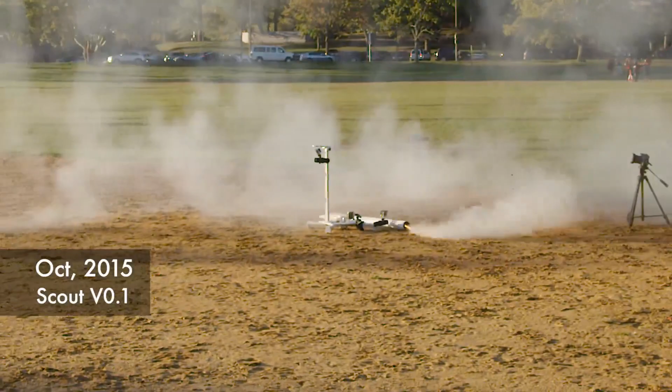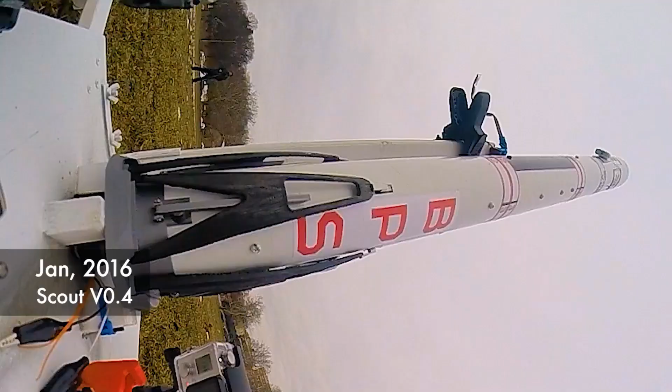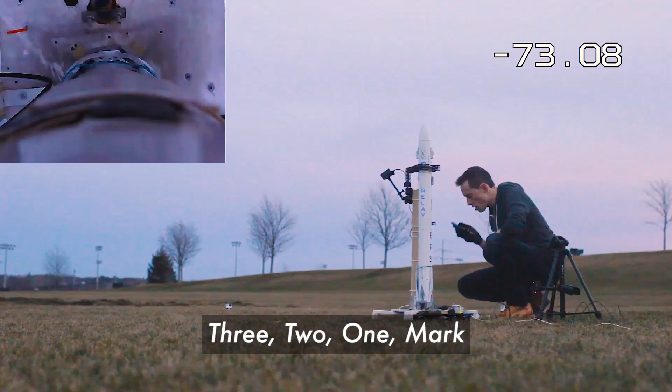The coolest thing I have ever seen. Oh dear.

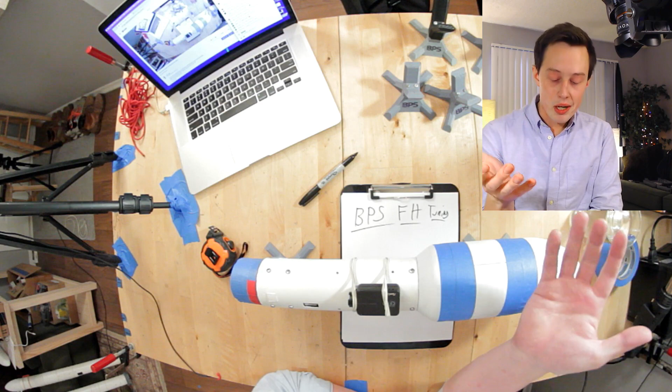Now, with a quadcopter or something like that, if you have a PID controller, that's what I use to stabilize most of my rockets. If you have a PID controller on a quadcopter, you could toss the copter up in the air and just put random P, I, and D gains in there. Those are like the sensitivities of the system. You could just toss some random ones in there, guess it, and see how things go. And with a quadcopter, your chance of breaking things is kind of high, but it's not nearly as high as a rocket. And so you don't really have room to guess on rockets.

You want to get all the math right that you can on the ground so that when it actually flies, you're not picking up the pieces after the flight. So that's what we're doing today. What we need to do is analyze how heavy this rocket is, how much force it's going to take to actually move it in one direction or the other, in all axes, and then we're going to bring it into a MATLAB and Simulink simulation and go through the process of tuning it.

Now, this isn't going to be the perfect way of doing it. In fact, this is not the correct way of doing it. It's a way that has worked for me, but if you are trying to actually build a rocket that goes to space, this is not going to work for you. We'll get into that a little bit later.

So you can see a MacBook in a MacBook, it's like MacBookception. Let me see if I can turn down the brightness and you can move it. This is probably a bad idea. Yeah, you can see it go through the vortex there. The Mac keyboard was backwards.

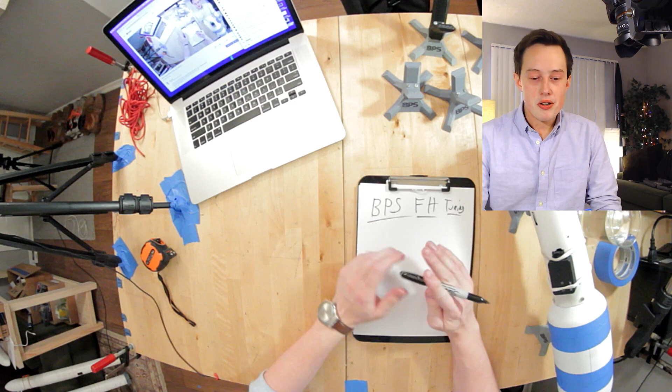Maybe we should get a better sense for the whole rocket before we do that. Before we do this, let's talk about a few more specifics. I know I'm delaying things, but hang tight, it'll be worth it. Let's move this over here and talk about changes.

One of the coolest things that will happen during the next flight of the Falcon Heavy model is we have active separation motors for the boosters. If you look up here, you'll see these tiny little A motors with a little igniter in them. These A motors are going to fire based mostly on a timer, and just a little bit of other control logic, but primarily based on a timer after launch. They fire and push the boosters back and away from the vehicle.

Man, it is crazy to me how hard it seems for some people to be nice in the chat today. Just be kind, man, it is so easy.

So anyway, that's the main difference from the last flight. We've also got some more control authority on the center core because we had very little on the last flight. And then I pulled back some of the abort limits on the second stage. Most of the changes are actually pretty small.

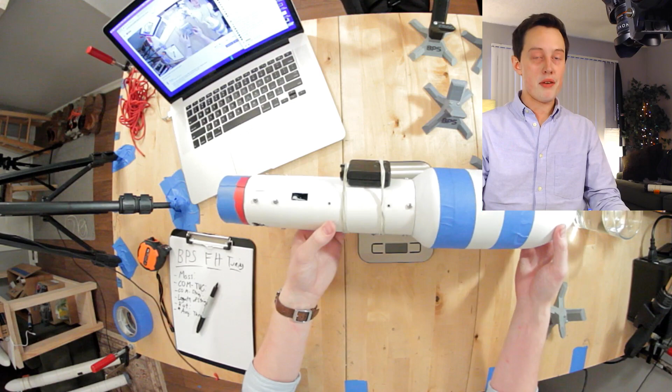Okay, we've got a scale, and I would like to put the rocket on it to see how heavy it is. But first I'd like to put a stand on there so I can balance the rocket on the scale. Make sure everything is out of the way. I'll zoom in a little so we can read out what the scale says. First I'll turn it on and zero it out.

There we go, zero. You probably can't really tell, but it's in grams. I don't have a reference weight here, but trust me, it's in grams. If I put the upper stage on here, rotate it a little, we have 846 grams.

Everyone remember that number, 846. Now, what did I say this was going to be in? Kilograms, right? So 846 grams becomes 0.846 kg. Always put your units next to whatever number you write.

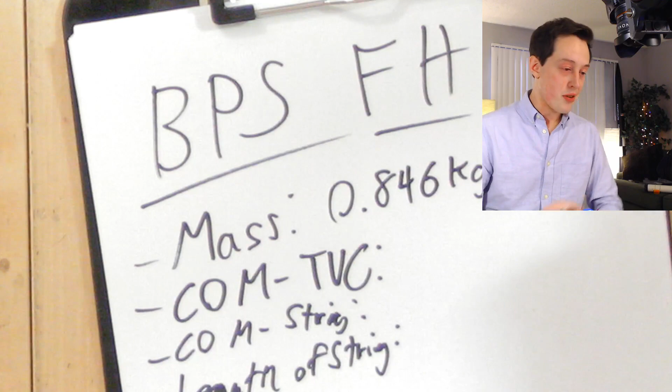Now the COM to TVC, that's the distance between the center of mass and the thrust vector control mount. So if I bring the rocket over here, I want to mark a couple of things with a piece of blue tape.

I'm going to pull a couple tiny pieces of blue tape here and use them to mark different points on the rocket. First, I'll lift the rocket up in different locations to try to find where it balances - if I lift it here it only comes up on this side. We're looking for where it will balance, and that's our center of mass, sometimes also called the center of gravity.

Okay, it feels like it's right about there. I'm going to take a piece of tape, put it right there, and label it CM - center of mass. Now I'll put a little dot in the middle so we can measure from exactly there. Oops, I got Sharpie on the rocket.

Cancel the launch, everybody. All right, now that we have our CM, we can measure the distance between the CM and the TVC mount, the thrust vector control mount.

There's a fly. Did I get it? I don't think I did. Joey B got fruit flies, y'all.

So just to be clear, there is an igniter in the motor, but it is not actually hooked up to the computer, so we're all good. Don't hook that stuff up until you're at the launch pad.

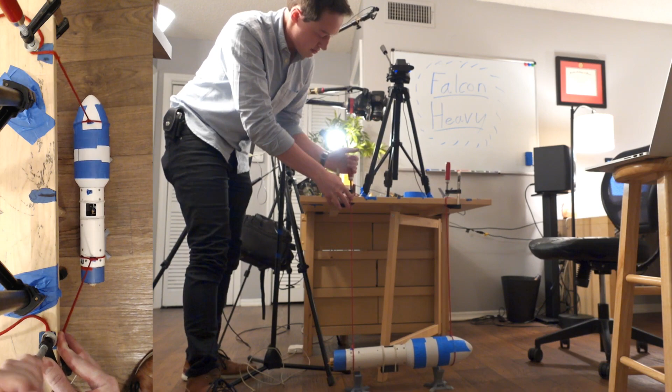Sorry if the audio is a little bit messed up. So this side, we're going to hang it here. Oh see, now it's swinging. And clamped. Now the last thing that I want to do here is just look on the ground to see...

Okay, so I need to raise this side up. We want it to be kind of like both sides need to be equidistant to the ground. So I'm going to raise that. The more accurate you can be about this, the better your test results will be. And the more accurate your test results will be. Okay, that looks pretty good to me. So now I'll move the clamps.

Someone's saying stuff in the Discord. What's going on here?

I need to change the chat mode too. Oh, we have 400 people. Thank you all for joining, by the way. If you're just joining, we're about to test the mass moment of inertia on the FH second stage.

So the next step here is to measure the distance of these strings, roughly from where they are attached or where they come off the table to slightly below, like slightly into the airframe. I found that to be the most accurate point to measure from. We're going to do this in centimeters and then convert it to meters.

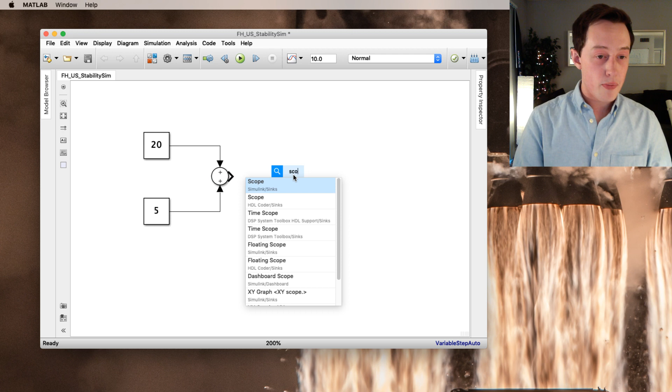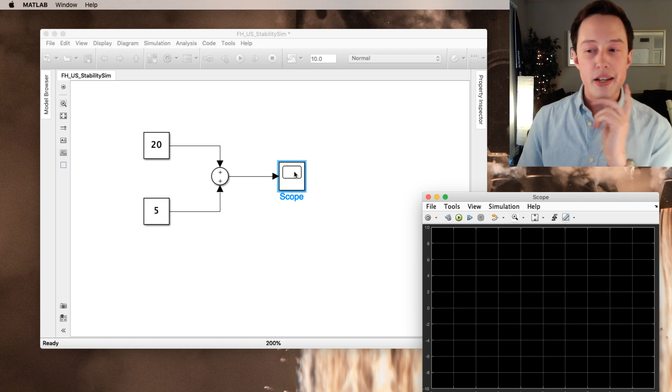And if we put 20 and 5 into there, and then we put a scope, which is going to plot our output, the scope with one input port should show 25, right? So if I open up the scope here, I think it's having trouble because OBS is running. Huh, that's interesting, why don't we see a value of 25 on our y-axis here? That's really interesting. Well, it's because we haven't run our simulation, right?

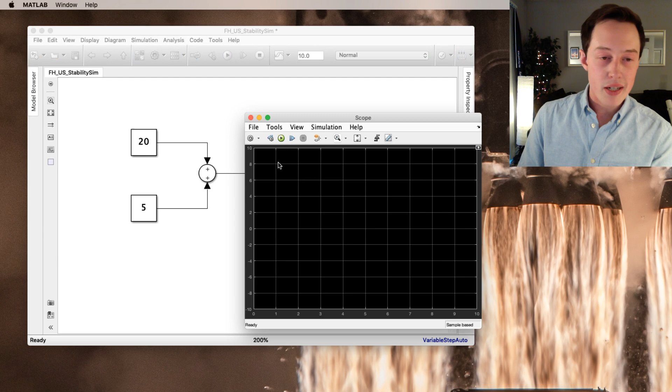So if I click the play button here, it's going to run for 10 seconds. Let me go ahead, get back to the scope, I'll click the play button here, and we should have a value of 25 in our scope. Here we go, it's going to take a second to run. 25! Claws up, everyone. Now this is about as basic as it could possibly get.

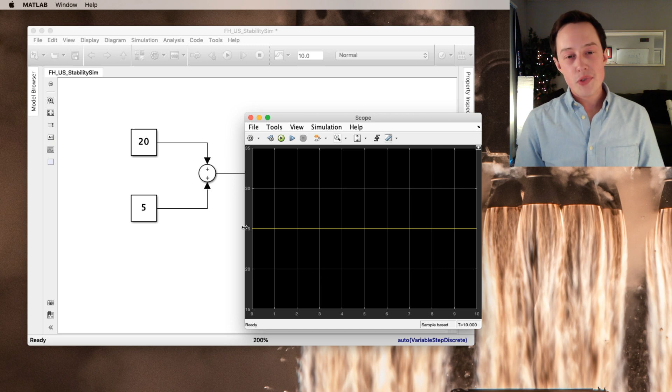MATLAB can get way more complicated than this. It's really good at matrix math, it's really good at a bunch of different things. But this is just sort of a demonstration to get everyone up to speed on what a block diagram is and what we can expect from it.

Let's just get a little bit more familiar here. Let's say we didn't want to immediately have the 20 and the 5 summed together, so let's move a couple of things around. Let's say we wanted the 5 to be added to the 20 a couple seconds into the simulation. I hope this is interesting to folks—my dad works at MATLAB, right? Jared, he works at the MathWorks, which makes MATLAB.

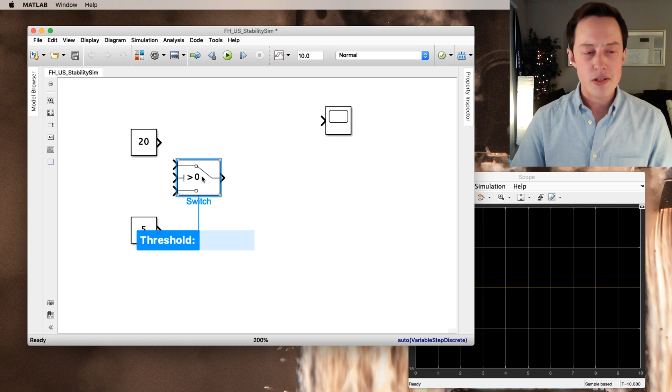So yes, you're correct. Let's say that I wanted to add these two together, but at a certain time step. So let's do a time-based simulation, we'll put a small switch in here. This is not necessarily the most efficient way to do a simulation, but with a threshold of 1, we'll have a small switch.

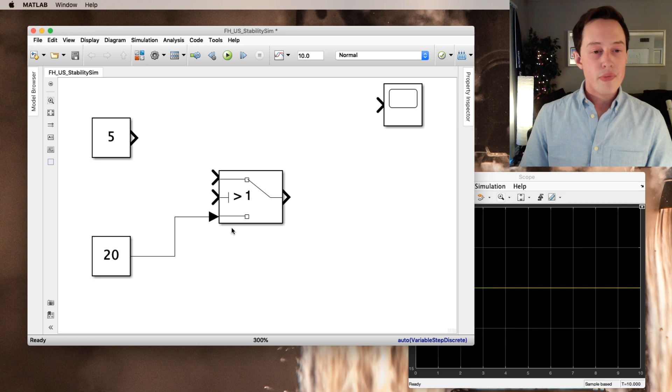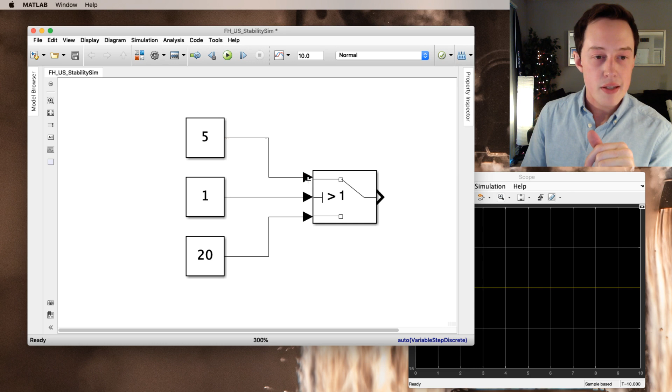And you can sort of guess by this current diagram what's going to happen on this switch. So we have some nominal input here, let's say 20, we'll switch the 20 and the 5. We have some nominal input of 20, and when the input, which is going to be right here, we'll put another constant of 1. When the input is greater than 1, we're going to switch to actually send the 5 through instead of the 20, right? So maybe we'll edit this to 25.

I promise, I know this is boring to start with, I just want to bring everyone up to speed here. So we've got this constant of 1, but it's always going to be on, right? We don't want this to always be 1 because we want our simulation to be timed. Well, I can do this in a couple of ways.

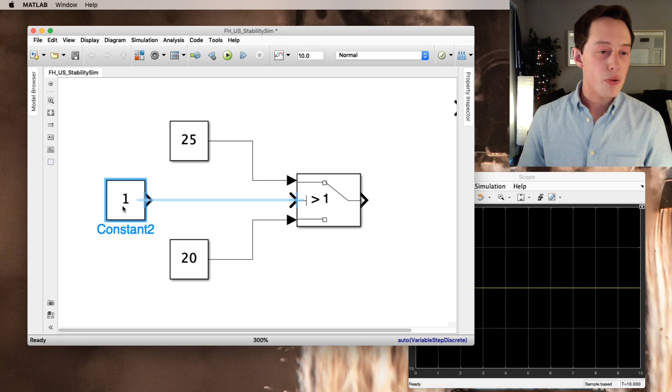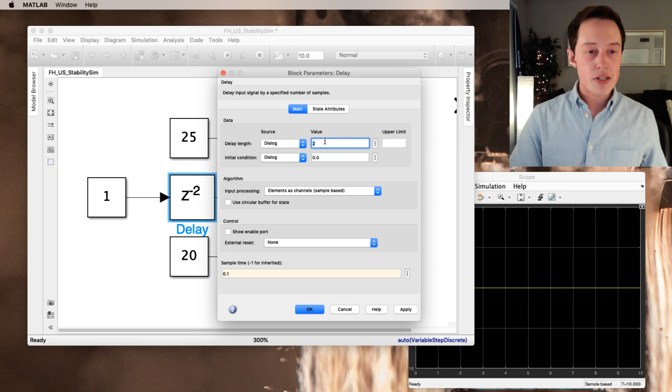I'll add a delay into our simulation in a janky way. This block represents a delay in whatever signal comes into it, delaying the signal and pushing it back out. If I go into the delay block and set it as a value, we have to set our sample time correctly. So our sample time could be 100 milliseconds, with a delay of 15. That means for 1.5 seconds, this 1 is not going to pass through here.

Now, does anyone see a problem with this already? Let's see if anyone can catch my problem. I'll go ahead and hook the scope up, but before we run it, there's a problem here. Something won't work about this, and I want to see if someone can catch what won't work. It shouldn't be that hard to figure out.

Let's see, I'll go ahead and save my model too. The 10-second runtime is not the problem. Nope, the 20 is not the problem. Yep, okay, Russell King gets it: greater than, not equal to. That's right. Our switch is set to be when the input is greater than 1, then we switch. But, ladies and gentlemen, the input is 1.

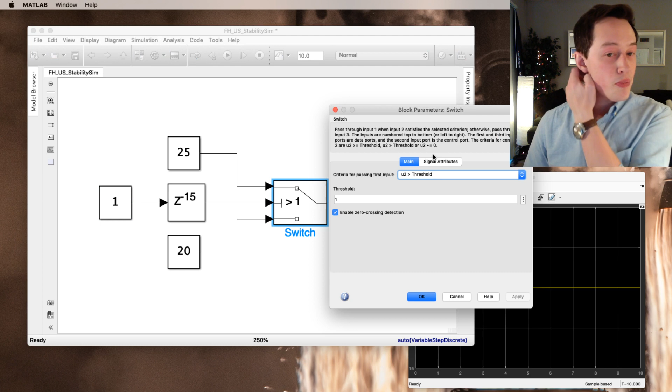So we have two ways we could fix this. We could make the input 2, and that would certainly work. Or, if we didn't want to make the input 2, we could go into the switch block and edit the logic in here, so the criteria for passing the first input should be greater than or equal to the threshold.

So we'll choose that. I'll open up the scope, and let's run the simulation and see if it works. We should see at 1.5 seconds we move from a value of 20 to 25. So here we go. There we go, it scales it so it looks a little weird, but we've got a 20 down here and a 25 up here. Let me grab my laptop really quick and make sure this stuff is coming through. Okay yeah, that looks pretty good.

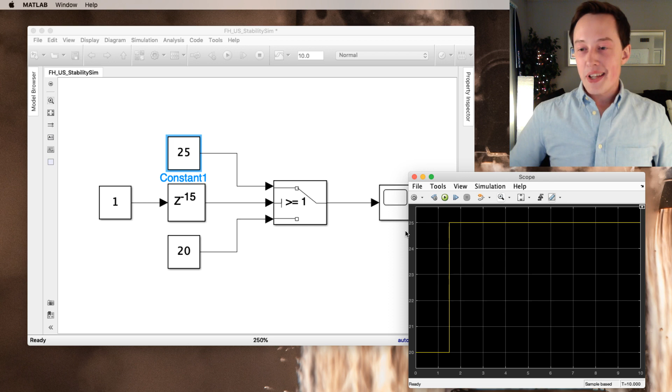Okay, how are we doing? Is everyone following along? I know this is very simple to just get started, but I just want to make sure everyone's following along, and then we'll get rolling here.

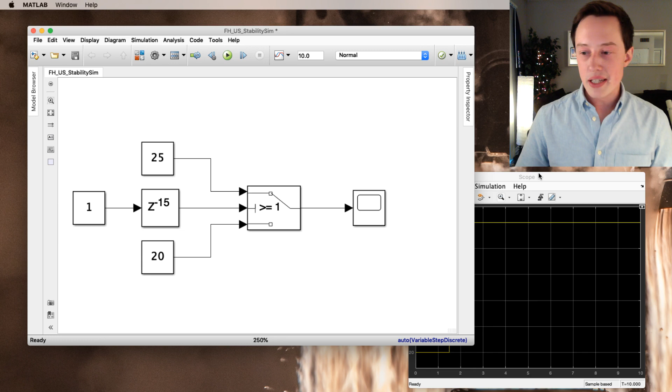Do I program MATLAB? You can. You can do really advanced things in MATLAB. You can also use something like MATLAB Coder to actually generate C code for you, so you don't actually have to. It's really helpful, and you should, because you might have to edit it. But MATLAB Coder could generate C code for something like this.

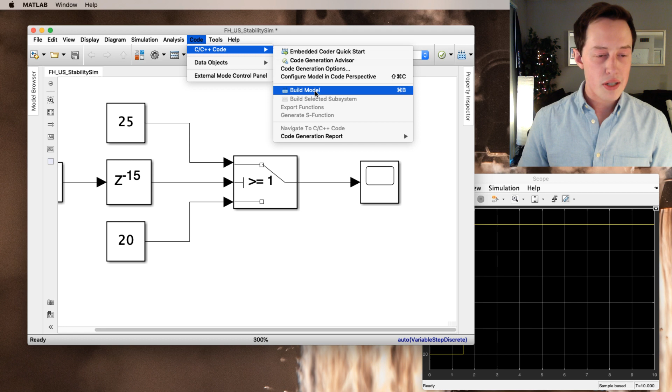If I go into code, I don't actually use this feature, so I'm not super familiar with it, but there's Code Generation Advisor, and you could build the model. There's actually an Arduino starter kit for this too. I looked into doing this for a while. If you go into the block library, you can do like PWM controllers, I think.

Search... you could build your whole flight software in Simulink, and then actually have it generate the code for you. Okay, no results for PWM. It's probably Pulse then. Yeah, so Pulse generator.

Anyway, but there's an Aerospace Blockset, so let's look at that. You can simulate a linear second order actuator, so this would be like if you have an LTI system, or if you're representing it as a completely linear model. You could do a nonlinear actuator, so that's like when your output is not directly a function of your input.

I know this is a lot, sorry for those who are not following. These are things that simulate aerodynamic models.

So it's pretty easy. If you're using something like Simscape, that's a visual simulator of what's going on, you could use one of the animation blocks. Equations of Motion, we're going to be using the 3DOF block here. There's GNC stuff, so there's all sorts of things, it's pretty cool. There's a lot of good stuff in Simulink. You can see why it's used in the industry.

Okay Joe, can you please slow down? Yes, I can, I'm so sorry, I get excited about these things.

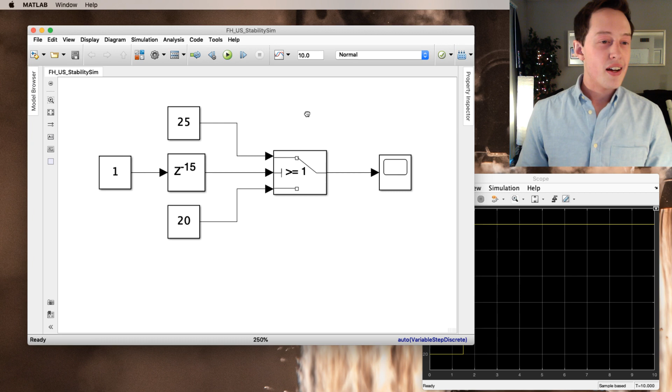All right, so let's ditch these, we're gonna get rid of them. Say goodbye, I hope you didn't want them because they're gone now. And let's put a new block in here.

This block is going to be called From Workspace. The From Workspace block pulls from our MATLAB workspace, which should be predictable. In my MATLAB workspace, which is the main MATLAB window not shown here, I've got a model, or I've got a... what do you call it? Oh my gosh.

It's a spreadsheet of the F-15 rocket motor, F-15_TC, I believe that's correct. Let me scope that real quick. If we look over the course of, say, 5 seconds instead of 10, we should see the thrust curve of an F-15 because that's coming from our MATLAB workspace.

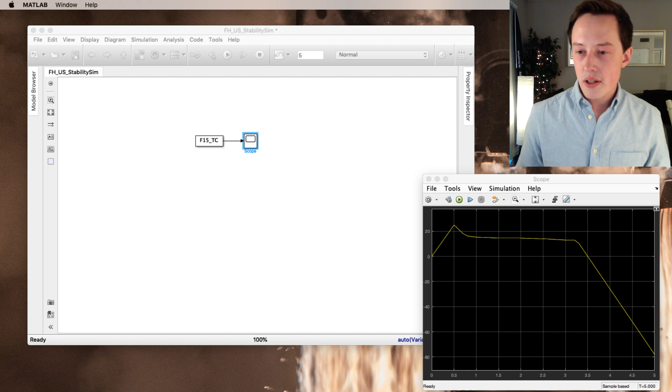So if I click play... that's not right. Oh wait, that's super weird. Why does it go down like that? It shouldn't go down after there. I must have some weird value in there.

What if I simulate for like 20 seconds? Does it ever stop? Maybe I have to put 2 zeros in here. Let me do this really quick.

Uh-oh, don't freeze. Don't freeze, MATLAB, don't do this to me. Oh jeez, oh my gosh. Can we get an F in the chat, please? I pushed too hard, I flew too close to the sun. Force quit. All right, we're going to go back, but please put an F in the chat while I try to reboot MATLAB, and we'll get going again here.

Please put the Fs in the chat. All right, stand by while I reopen the sim. Just MATLAB things, it crashes every now and then. I also really need to update my computer, or not update, but reset. My computer is in dire need of a full reset here.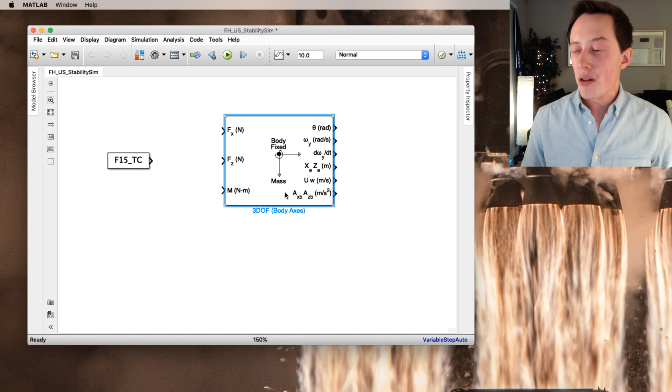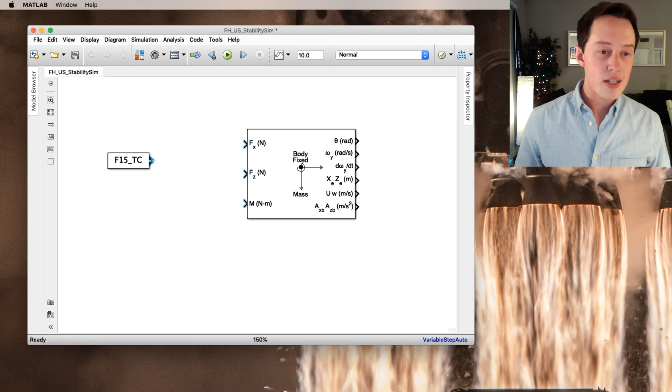I'm not really going to explain all of the stuff we have going on here, you'll just have to trust me that it works. We're basically simulating just one axis of rotation, and if we want, we could do some translation stuff in here too. But we have all of these inputs and outputs. Now if we wanted to simulate the flight of the rocket, we could put the F-15 TC into the Z-axis, the Z-body axis, and then we could do something like this.

In our block parameters, we could set the initial mass to, yeah okay, this will be 1 kilogram of initial mass. Our initial velocity is 0. Then you can set initial conditions for all of these types of things. Our acceleration due to gravity is going to be negative 9.81.

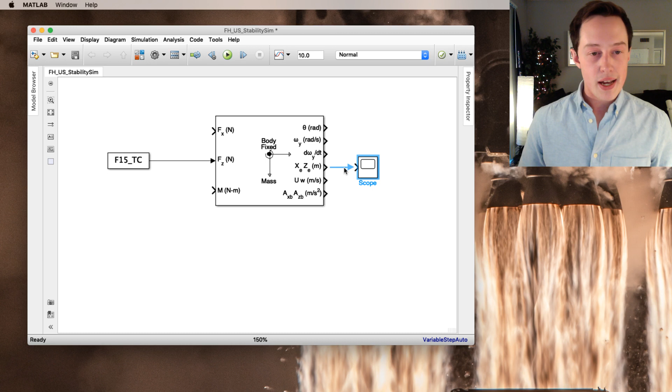And then if we go and bring a scope up here with just one input port, and pull out of our X and Z axes - I know this might look like nonsense to some people - if I hit play, we should have a simulation of flight with an F-15. There we go. All right, oh, our simulation is way too long, let's simulate for like 5 seconds.

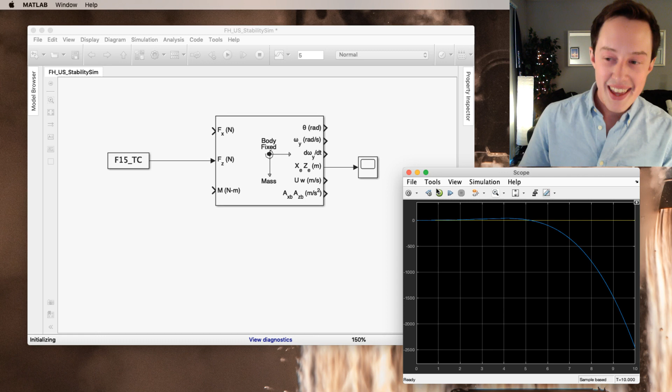Hang on, it just scaled way down because we let it go for too long. We don't have lower limits.

Here we go. Oh, come on buddy, you can do it. Oh no. Don't do this. Where's the gif of Michael Scott going, 'No, God, please, no'?

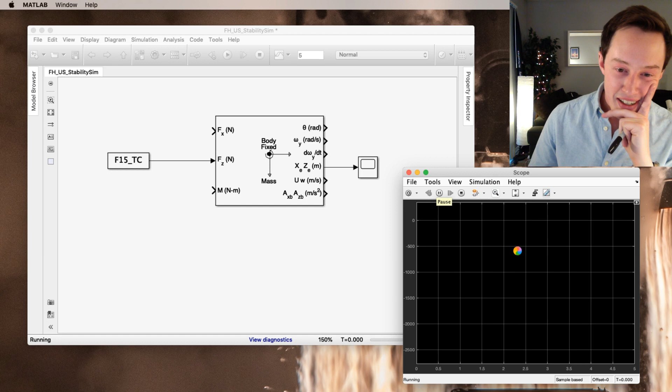No! Why? I think it's OBS. I'm blaming OBS.

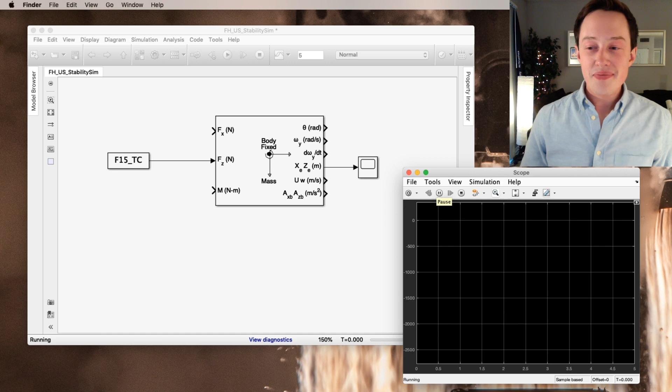All right, this is ridiculous, this shouldn't happen. All right, we're going to try this one more time, you just have to be patient. Oh my gosh, all right. Force quit, where's the force quit? We're going to force quit.

Let's answer some more questions here while I reboot one more time. And if it doesn't work the third time, we're just going to find something else to do. Maybe we'll look inside the fairing and see what's going on. But I'm going to reboot MATLAB, we're going to try this again.

Oh jeez. Oh boy. What can we do for questions here?

Isn't there a SpaceX launch tonight? Yes, there might be two. There's definitely CRS-18, and I believe there's a Starhopper launch as well.

Why do you not use OpenRocket? Because OpenRocket cannot simulate all of the things that I want, and I want more control over my simulation than OpenRocket allows.

Okay, finish importing these things. And once it does that...

Hey Joe, what are your incentives to keep you on the ball with testing rockets? Thanks from Austria. What do you mean exactly? If you mean what keeps me motivated, it's just focusing on things that I know I can do well at. I know that sounds weird, but if you're always doing hard things, you're always going to be running into walls. I'm not good at explaining this, but it's focusing on the little wins that helps keep me motivated.

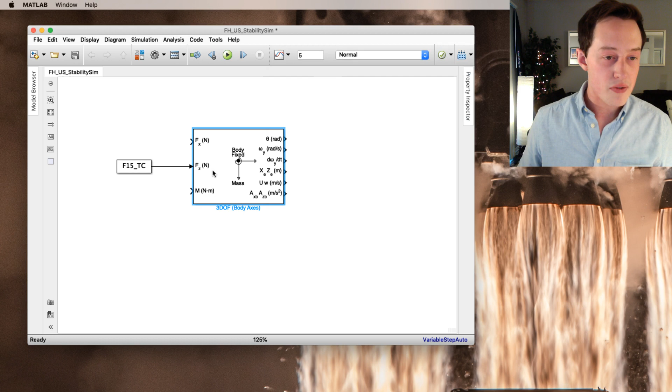Next thing we need is the 3DOF block, body axis. I'm just trying to show that we can use this. This is our force in newtons, into the 3DOF block with an initial velocity of 0, with acceleration due to gravity of negative 9.81, an initial mass of 1 kilogram. And we can use a scope at the very end of it with one input port right here.

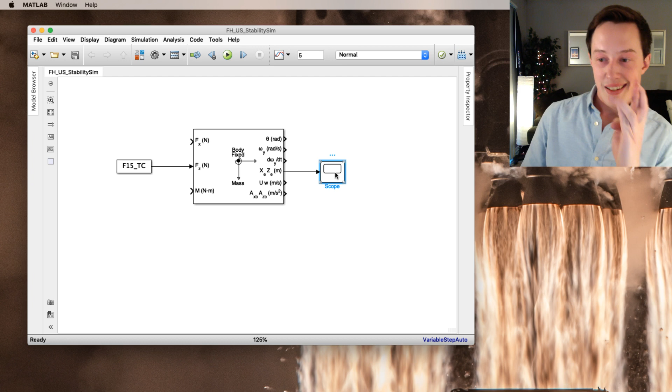I'm going to save, and then we're going to plot. All right. Okay, here we go. Fingers crossed, it should just simulate the flight.

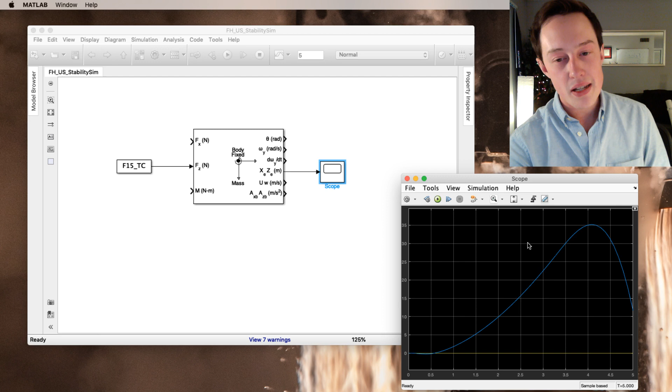Yes! My goodness, thank you. So if we had a mass of 1 kilogram with an F-15 rocket motor, and this is in no way real, but if we had a mass of 1 kilogram with an F-15 rocket motor, we would ascend to roughly 35 meters. Does anyone know what's wrong with this right now?

There's a lot that's wrong with this, but go ahead and tell me what's wrong with this. There are things which are wrong, put it in the chat please. Let's get some error checking here. We'll do that, actually let's do a new scope, scope with 2 input ports. There we go.

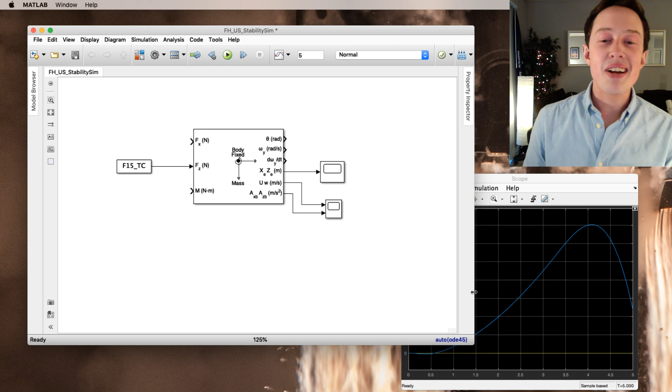Yeah, okay, everyone's got it. No aerodynamic force, no drag there. Right, so this is assuming that we have no drag in our rocket, right?

Let's take a look at another scope here, which is going to plot velocity and acceleration. Let me use the zoom tool... oh dear, okay, hold on, let's zoom back out. Let's use the zoom tool and look at our velocity and acceleration.

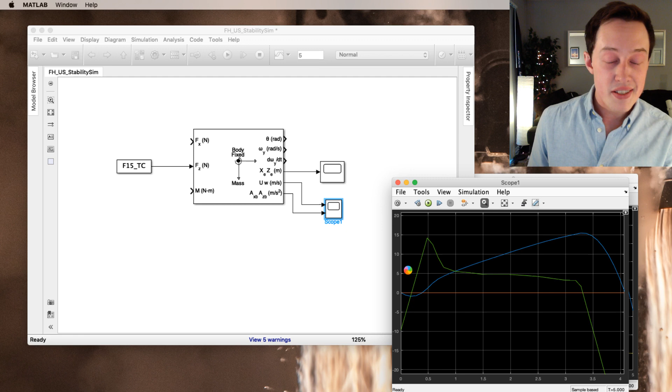So the green line, this more rigid one, is the acceleration of the rocket. You can see it basically mimics the thrust curve. We don't have any thrust losses programmed into here. There's actually a lot going on that we don't account for. But we start going up. We also have this weird discrepancy at the bottom here. Oh my gosh, no. This is the worst thing that's ever happened to me.

Never, ever, ever again will I do MATLAB on a live stream. Okay, here's what I can tell you. It obviously doesn't do this every time, because otherwise I'd never get anything done. So something happens between OBS and MATLAB where they just fight each other in the computer.

I can't believe it crashed. At least I can show you: the green line is the acceleration of the vehicle, the blue line is the velocity in meters per second. So we would hit about 15 meters per second.

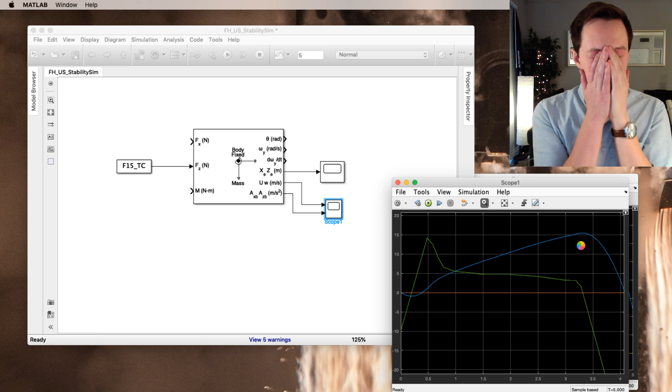I can't believe it crashed a third time. All right, well, we have to still do something because I'm here, right? I'm here, I'm hanging out.

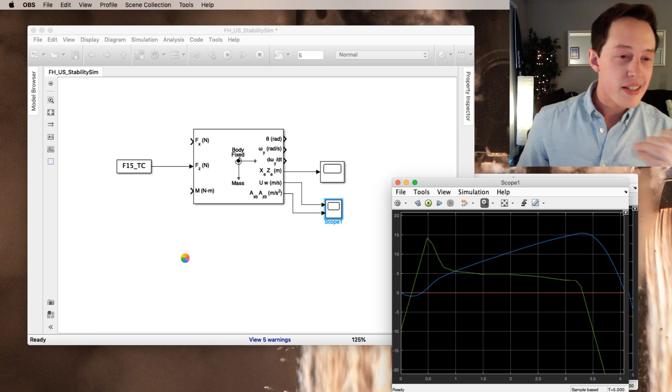Here's what I can tell you. Usually what you would do in MATLAB, at least what I do, is I end up sending the F15TC through a vector resolution section where you convert to radians, send it through sine, multiply by the angle of the TVC mount. This is a whole closed loop thing that I usually have. You put it into the moment thing here, program the inertia in correctly. If you want, you can program in a ramp of inertia change while you lose mass. And then you can plot it. You can also take the output of theta, which is in radians - that's going to be your orientation.

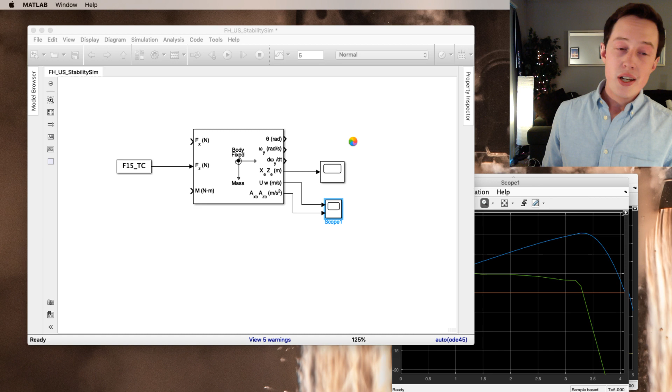That gets turned back into degrees. You feed that back into the PID controller, which you can just generate a PID here - it's a feed forward, or like a forward Euler or something, whatever it is. Back into the PID, you can tune the PID, you can even open the PID tuner. Then after the PID, you simulate either through a transfer function or through a janky moving average, like a delay thing. If you don't want to linearize it, you can feed that through to simulate the slosh and the slop and the TVC mount. You can do whatever you want, and then you send it back in to the vector resolution here for the thrust curve and TVC block. That's how this works.

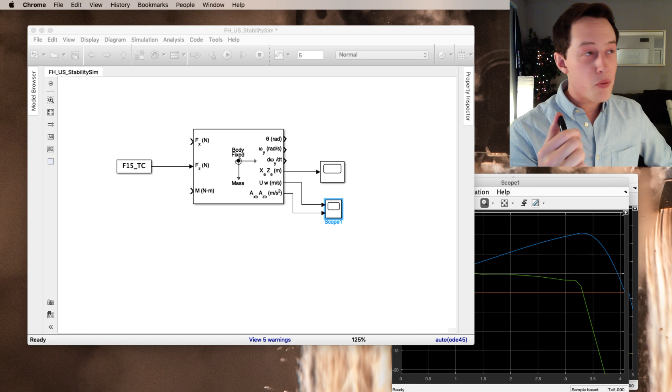Oh boy. People want KSP. I'd be down for KSP. Simulate it in KSP? Should we do that? Are people into simulating the model Falcon Heavy in Kerbal Space Program? Here's what I'll tell you, I'm totally down to do it, but we have to go over to the other channel, because that's the rule that I have - KSP only happens on the other channel.

Can we do one thing? Listen, don't leave, don't leave, because we have to look at one thing really quick. All right, check it, I wanted to show this on the stream, and now I will do it. Hold on, stand by.

So this is the upper stage, right? We've all seen this, we worked with it earlier today. And...

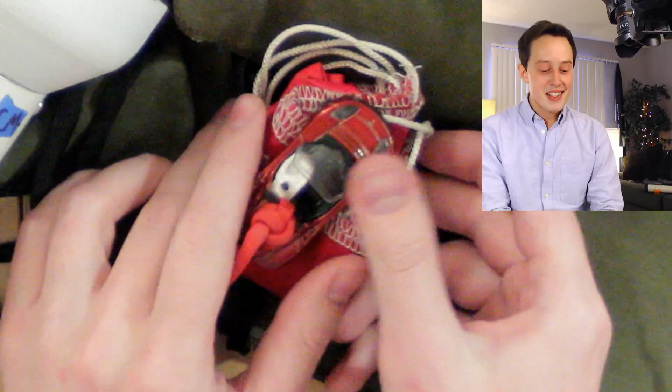And then this winter, he sent me a bunch of composite material and some hoses for some special projects. And along with it, he sent a little tiny Tesla Roadster. So that's flying, it's the true Hot Wheels version. I'm really excited for it. Yeah, it's going to be good. It's a little bit heavier than this, but it's obviously worth the weight.

Yeah, and so that's the FH upper stage, that's what we got going on there. So, hold on 1 second, stand by.

Here's the deal, folks. We're going to simulate the flight, because I said we would. That's what the title of the video is: Model Tuning and Simulation.

Oh no, should we... Now I feel bad, because I didn't actually tune the model and simulate it. Okay listen, if you're watching this back, if you're watching the VOD, I need you to put some comment in the comment section that expresses that I did really try to simulate it. I'm not just trying to pull one over on everyone to get more views or something like that. I tried, and MATLAB crashed 3 times. So just put one in there so everyone doesn't think it's, I don't know, bad.